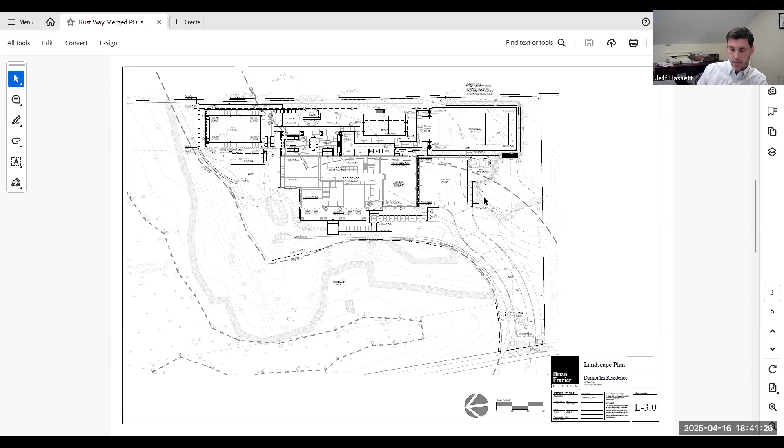On the new plans, we're exposing some ledge in this area. We're also cutting that angle off, so it's really only enough room for 1 car and has more of a natural curved look. By doing that, we've increased the amount of ledge to be preserved or exposed from 432 square feet to 708 square feet. So almost double the ledge preservation in the second approach. Yeah, it's a 1.7 to 1—I think it's like 1.73.

Okay, so this is the site plan in blue showing the same area. All right, thank you. You're welcome.

Jeff, do you have a picture of the situation? Like a photograph of the site. Yes, yeah, I submitted that. I remember seeing it. I think it's in our submittal plans in the application materials.

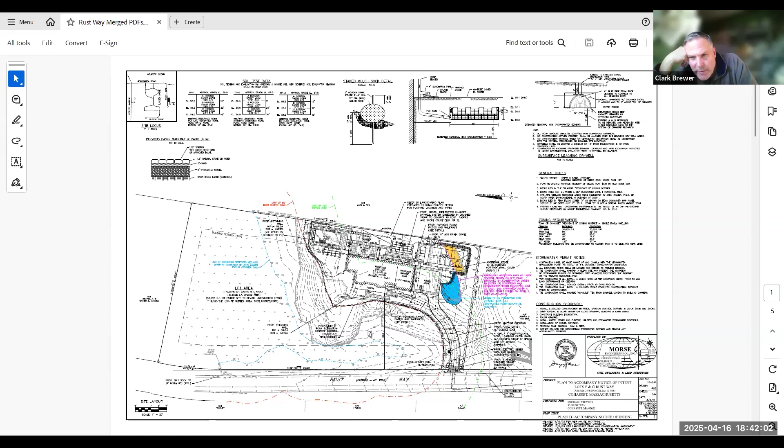Here, I have it. Sharing. There it is.

So these are the corners of the pickleball court. This is the downhill left side. You can see a stake up here for the upper corners. Now, I guess this is kind of outside of the viewport, but this area here of ledge, going off the page, is what's going to be preserved.

Now, if you look at this site on an aerial image from 2021, it's completely wooded. You can barely make out that there's ledge in this area. Over the last couple of years of work, this was mostly all approved work area. They've removed some of the ledge already within their rights, and they've also cleared the whole area off and had it ready to go to have some partially removed.

Birgit, did you have a comment? I thought I saw you.

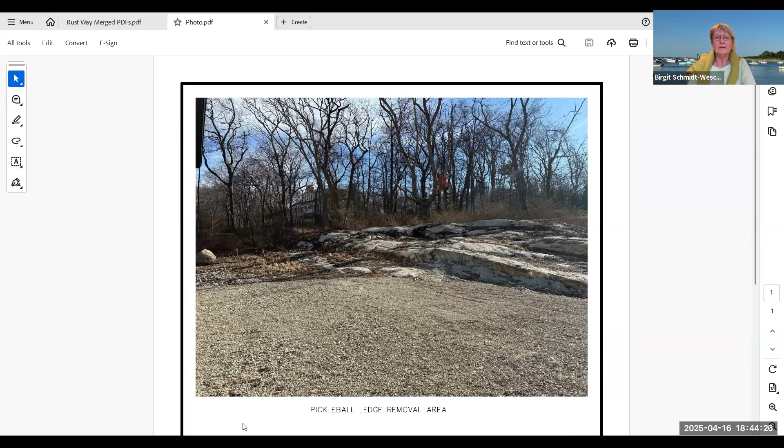I would like to point to our bylaw as we have it since December, which is not going by square footage, it's going by volume. I think you provided the volume figures for the ledge to be removed, and also the one you are suggesting to preserve. What we should look at first is what the bylaw is asking: the amount of ledge to be removed in cubic yards should match the project you actually want to build.

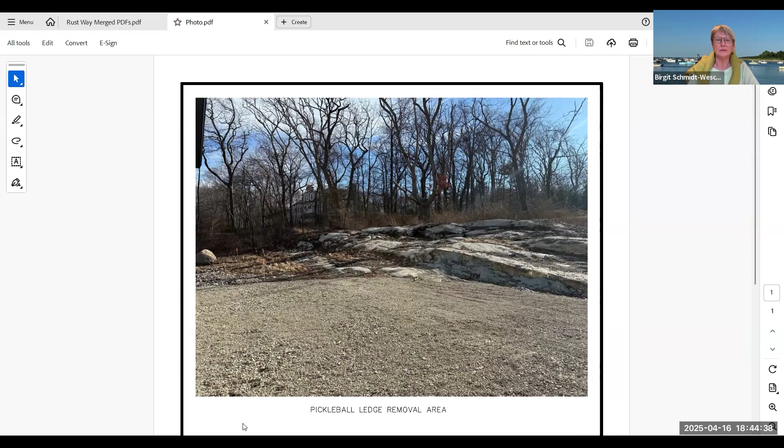Correct me if I'm wrong, right? Yeah, I have multiple emails and information points open here. So the ledge to be removed is altogether... it would probably help if you just leave the plan on, Jeff. Okay, let me pull it back up. Yeah, it helps just to kind of see it.

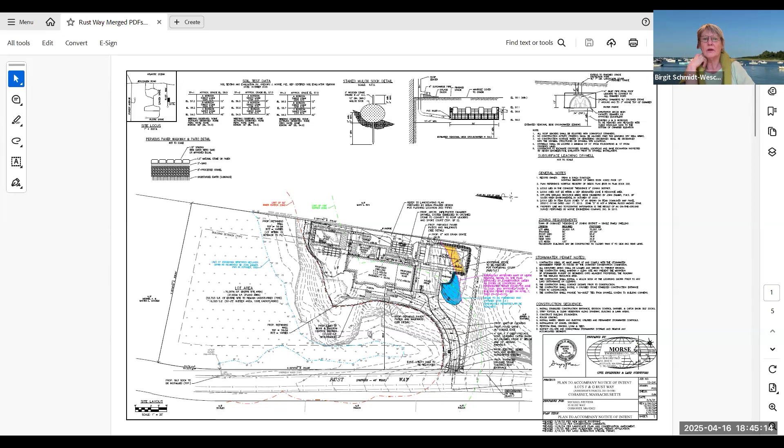Thank you. And if you could just zoom into what we are looking at, the orange and the blue areas. Perfect.

So again, the matching that we are requiring has to do, come on a volume level. So the volume in cubic yards for the ledge to be removed, you provided as 115 cubic yards.

Now, the ledge itself is only cutting across part of the pickleball field. But leave that aside—even if you take the entire pickleball field plus a walkway around it, and look at that, because that's the project you want to build, I tried to calculate how large a pickleball field is, how deep you should go, and how much room to leave for walking around it. I came to something above 30 cubic yards.

And that's already, as I said, a pretty generous calculation. So to have that in mind, that's already almost a 1-3 to 1-4 ratio of what is taken away versus what needs to be built.

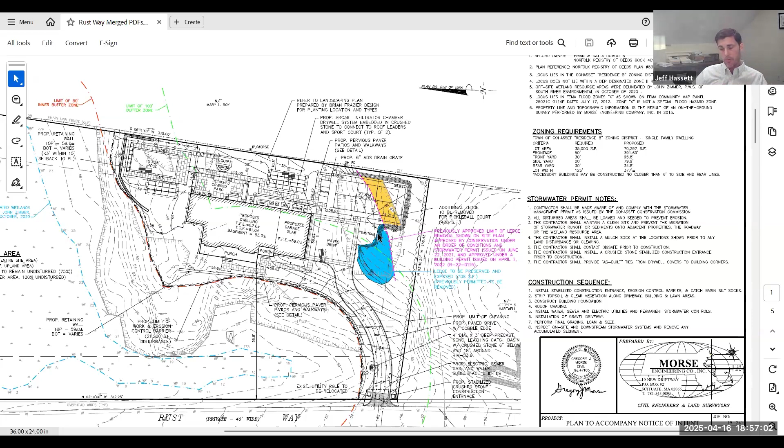In my opinion, it's a huge change in that we made the driveway way smaller, and we've almost doubled the amount of ledge that's being preserved. That's way more than what was asked for at the last meeting and discussed. So I don't know, in my opinion, it does comply. At the next meeting, hopefully this will go to an actual public hearing and we can get further into that. But for the time being, in my opinion, this is a significant change, and there really aren't any opportunities to change it much further given the size of the property.

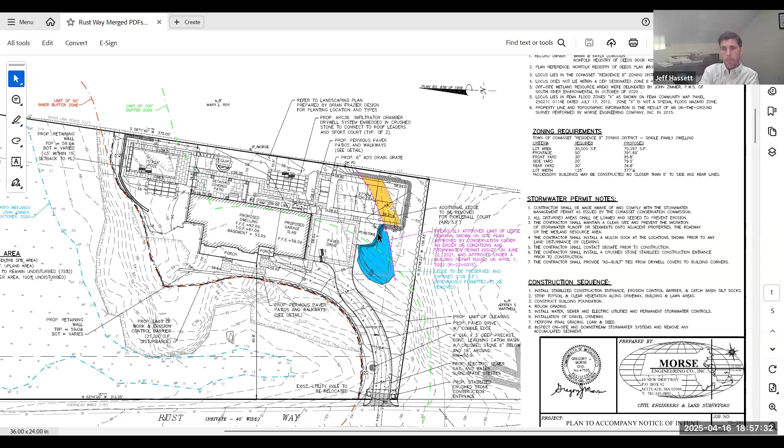Let me just quickly say, for your other application, the one we heard at the same time, the 42 West, that was a different constellation. It was if you move something from one side to the other, from one place to the other on the same property and lot, that is exempt. That's different. Here we did look into this volume question for good reason.

So that a huge ledge in the way of something is not going to be taken away just, for example, for a driveway, which really needs in height only very minimal volume compared to the big ledge that you would be taking away.

So this is similar reasoning here, as I said, the numbers do not match up. We have the very flat pickleball field, and if we went very, very strictly, we could probably only look at the area where the ledge is and calculate that off of the pickleball field, and then we're down to 10. So it's a ratio of 1 to 10 that we'd be looking at - volume of about 115 cubic yards of ledge that has to go for maybe 10 cubic yards of the corner of the pickleball field that we're looking at here.

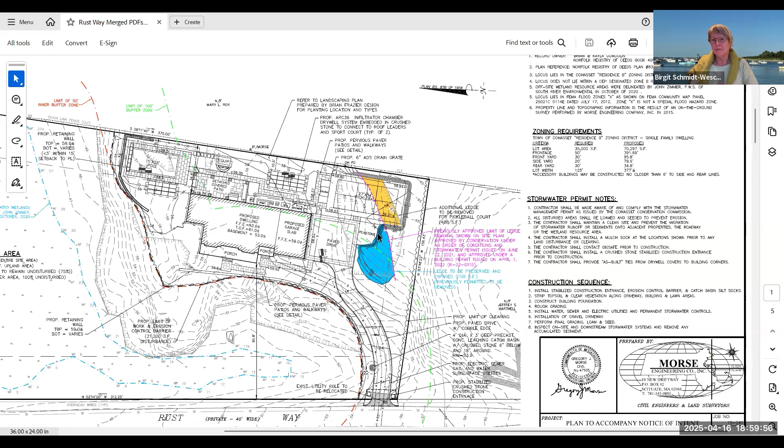So this is where we started the discussion. And the exposure of other ledge somewhere is not necessarily something - as far as I interpret our bylaws correctly - that we have to look into, unless it is a very significant matching. But we don't necessarily have to. So the fact that even the matching here in square footage, yes, because it's a pretty flat

ledge there around the parking, we get to a larger square footage, but volume-wise, it was about 17 cubic yards, I think. So we are by no means getting into the range that we are looking for. And again, this is not necessary.

So the problem with calculating the volume of the ledge is you really can't calculate the volume of ledge to be exposed. It's really a square footage calculation. If you have to calculate the volume, how deep do you go? There's really no way to do that. It's also how high you go. So that's why you're getting a low volume - it's only the volume that otherwise would have been removed, not the volume of what's being exposed.

I see that this ledge bylaw is part of the alteration bylaw, not a prohibition against ledge removal. It has a special permit review, and then we get to talk about what options there might be to meet the project goals. It's not a prohibition on ledge removal. That's not what the bylaw was about, because that would be a problem for 50% of the properties in Cohasset.

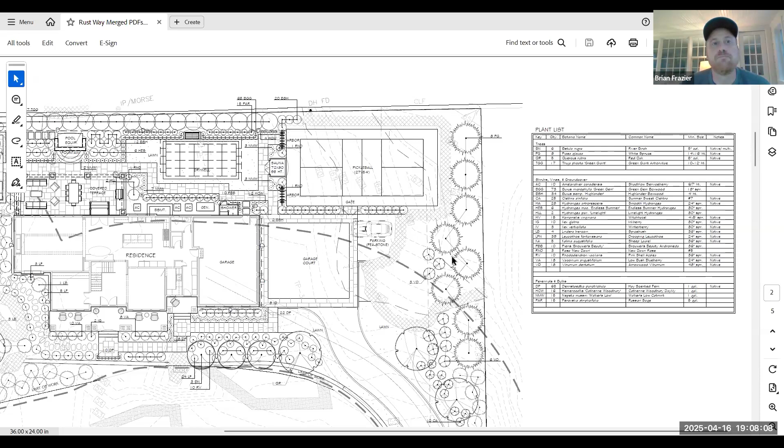Amy, I think the discussion at this point is worthy of taking a straw poll about the sentiment that the members of the board have regarding the situation. And I recognize that in saying what I just said, that would mean either we go ahead or we go back to a new starting point.

Well, Ms. Glassmeyer, you haven't made any comments about what's proposed as being substantially different. And as counsel said, it's a subjective decision by the board.

So in my view, I have two perspectives. One is that this might not have ever occurred had a process recognizing what would need to be done with the new bylaw actually been in operation. So to some extent, we are in a situation where we are looking at something that has had a significant change that's legally binding.

My view is that the impact on that particular piece of the property with an intense utilization activity is going to be potentially quite disruptive. Had there been a process that led up to this, rather than it essentially arriving associated with planning and managing it, I think it might have been a different situation, but we didn't have any choice. I feel like, if anything, a fait accompli was dealt to us. This is not a negative for anybody involved in this, it just turns out that way.

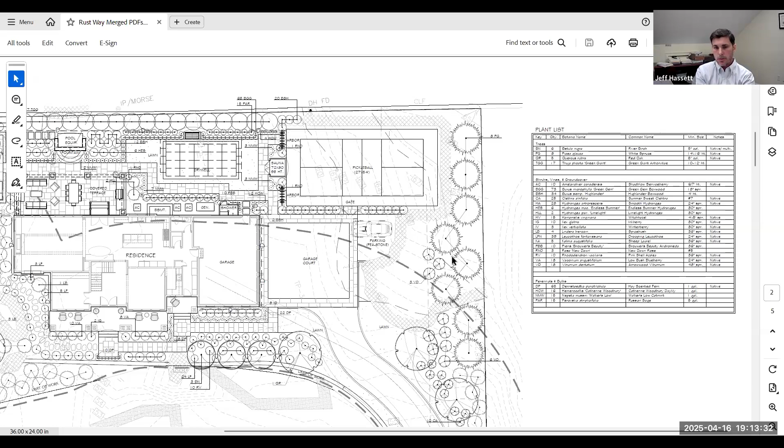I'll make a motion that what we've seen tonight appears to be materially different enough from what was not approved at our regular special permit hearing. Second.

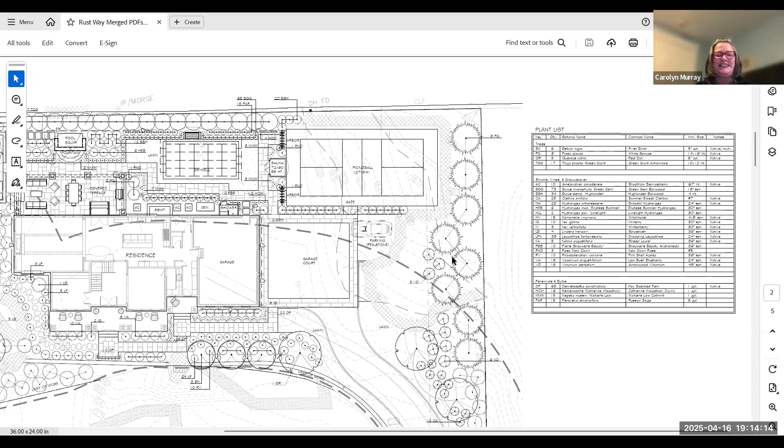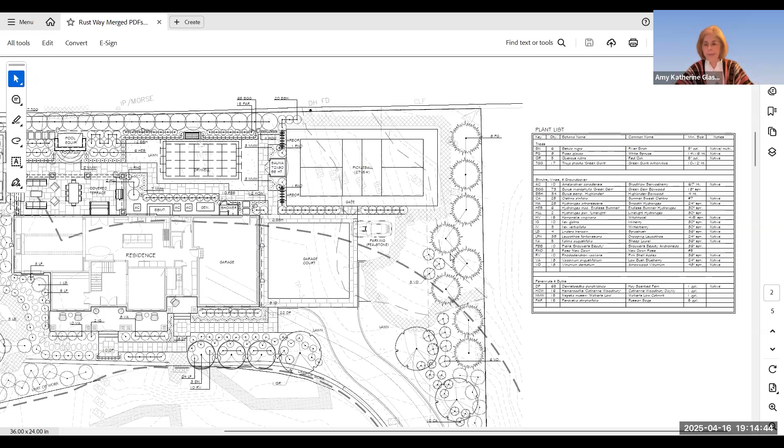So the item is now going to be essentially starting over. And we have a date... Not the entire project, no. No, no, no. The applicant has to submit a different plan for consideration of it being materially different. That's correct. Wait, can we back up a moment?

What I just heard sounded more like a 3-1 or a 2-2 vote. It was 2-2. 2-2 doesn't pass. That doesn't make this... you have not found this to be a material change.

So does that mean they are banned from coming back for 2 years? The applicant can't come with any special permit, no matter what. They could, I suppose, come up with something entirely new. Right, but could they change what we just saw tonight as being materially different? They could change it and come back and we could have another 45-minute discussion about it, and then vote however we vote. Is that right?

No, I don't think they could just come back with another pickleball court application and reorient the pickleball court a little bit. I don't think that's necessarily what they would do. I didn't suggest that was what they would do. I don't know what the applicant's team would do as something that the board should consider as being a material change.

I have no idea. No, but Clark, as far as I understand, and I've gone through a lot of training recently so it's all fresh in my mind, I don't think there is another material change discussion with respect to this particular item. We just had a material change discussion, and we're not going to have another one. If the applicant comes back to us with another proposal that they believe is a material change, we have to take a look at it and decide.

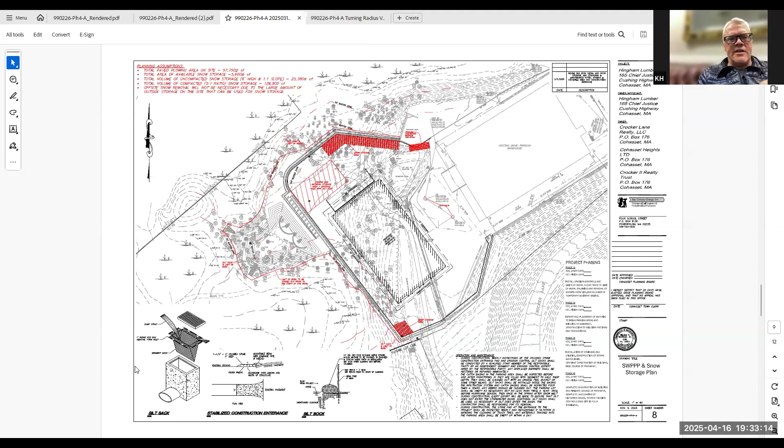Sure. So what Hingham Lumber estimates is this facility is being used to reallocate space within their existing building, outside storage. So what they're estimating for the amount of traffic it's going to generate is 1 additional tractor trailer trip per day and 10 delivery trucks additional per day—so that's roughly 11 trips per day. The amount of traffic out on 3A, according to the Vanasse report for the Scituate Hill project, is 20,450 trips per day, and that was in 2022, so it's probably only gone up since then. So that's where we came up with that, like 1/10 of 1%.

It's really very de minimis. There's no foot traffic—this is not a drive-through building. This is only for storage for Hingham Lumber, so we don't expect any more, say, Joe Homeowner going up there through there. The additional flow would be delivery vehicles that they were sending out or coming in.

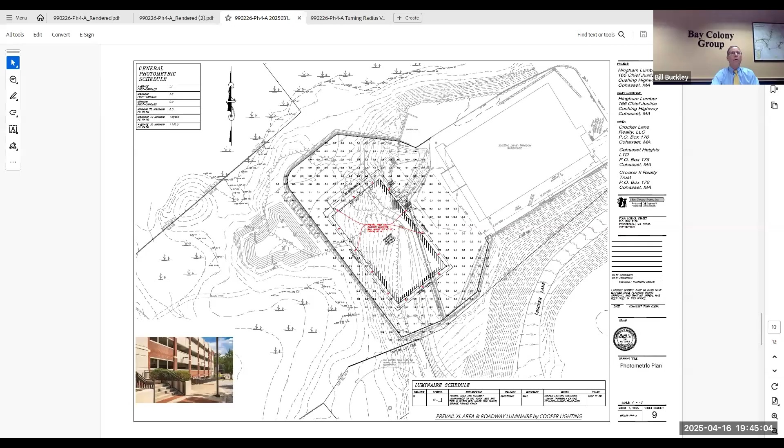Leaving or entering? I'm going to put up this diagram that we... I don't know why I can't do this. Let's see. Here we go. Not this one, hold on. Can we see that? I can.

Okay, good. So the way the traffic is—and Tom, jump in here if I misspeak—3A is out here, so there's a driveway that comes in. This is the drive through the existing building. Trucks come in and they go counterclockwise around the site. So they currently come in the back here, they'll go in this area. This is the loading and unloading area.

And then there's this kind of light line, which you see right there—this is the edge of the existing pavement. So they come into the back, they load and unload, and then go back this way.

So the way we see the traffic flow coming in now, and what we're showing here for the most part, these are tractor trailers coming in. This side of the building has 4 loading docks that are depressed so that trucks can come in—the tractor trailers, everybody knows what I'm talking about. So a tractor trailer would come in, and what we're showing is how they get in: it would come in and then back into the site and then unload into this building.

And then when it leaves, it goes out this way, which is what this turn shows, and then goes back out down this way. Other tractor trailers, depending on the materials they have, might come in. Again, they all come in this direction. They load and unload here.

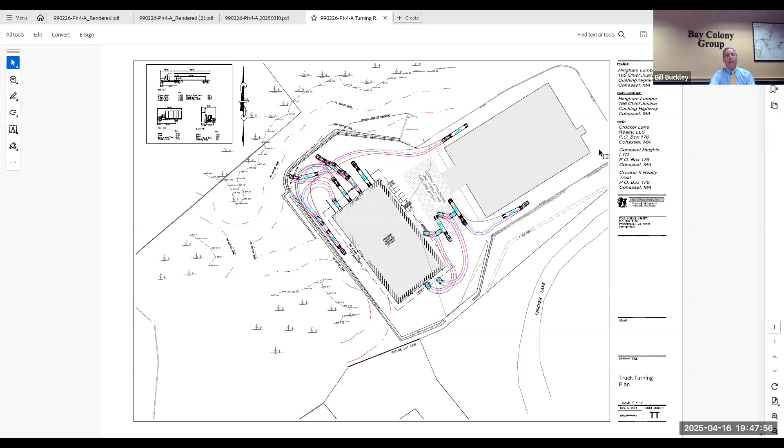And that's it. It all comes in from this one driveway from 3A, goes counterclockwise around the buildings or building, and then back out down that roadway. Is all that somewhat clear?

Okay, so what is the entrance radius coming into the driveway? If the truck is coming from the east or the west, are they going to be making a sharp turn to come into the driveway if they're a large truck? Are you talking about out on 3A or site management? Yeah.

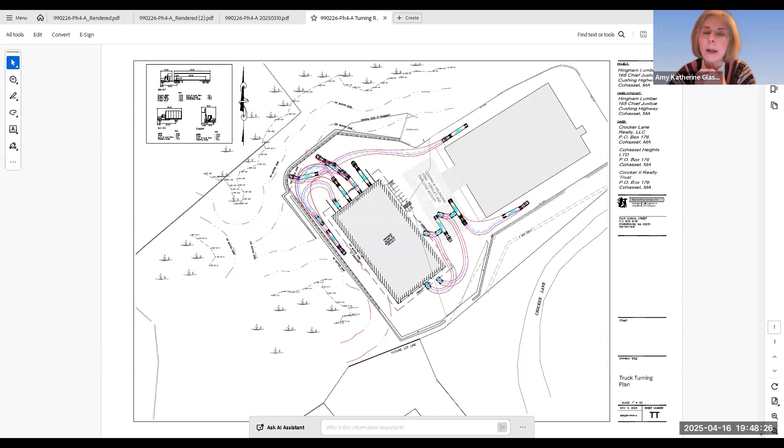When the truck is coming off of 3A into the driveway, what is the angle of it? Yes, it's right here. So where you've got it now, right? This is my screen you're looking at. So if you were to measure that distance, I have to move this.

It's approximately 80 feet, I believe. So if we were to take a spot here and go to here, you've got about 77 feet in width on the entrance, and as far as the width of the actual driveway, it's about 25-30 feet. So it's not a situation where cars are banging a very hard left or a hard right.

It's wide enough at the intersection of Chief Justice Cushing Highway and the driveway to be able to angle in. And as far as the counts are concerned, correct me if I'm wrong Bill, but I believe in order for you to make the analysis you did as far as trip generations are concerned, you utilized data that had already been counted on a traffic study done in this area. So you already had that, and then you just did a calculation to figure out how many more trucks we might be adding in a worst case scenario.

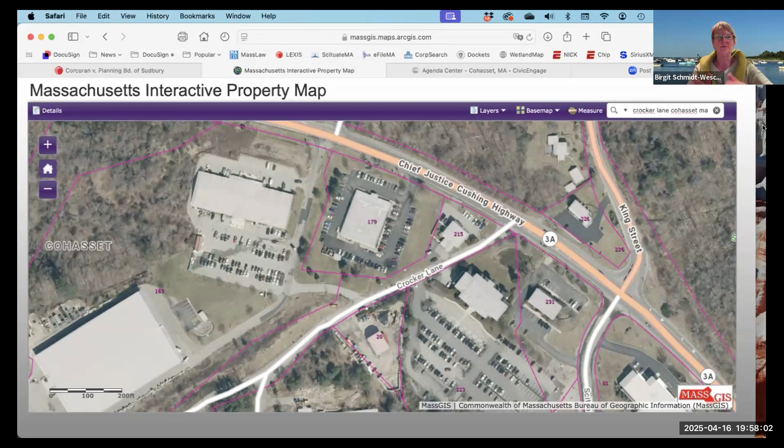Tom, you're best to answer that question. Yeah, that's one of the issues we have, leaving lumber outside. It may deteriorate, and we want to keep it inside. So we're going to try to get as much lumber inside as possible. As far as blocks, pavers and things of that nature, masonry products, those will still remain outside. But the lumber portion, decking and whatnot, we want to get inside.

You just have to move it somewhere, right? Because the roads leading in and out to the storage building will pass by the lumber building. And now the stone material and some of the lumber materials are to the side and to the back of your current lumber building. So where are you going to move it? That was my question.

Do you think you answered that, Tom? I hope so. If I didn't, I can. Yeah, where would the stones go that do stay outside?